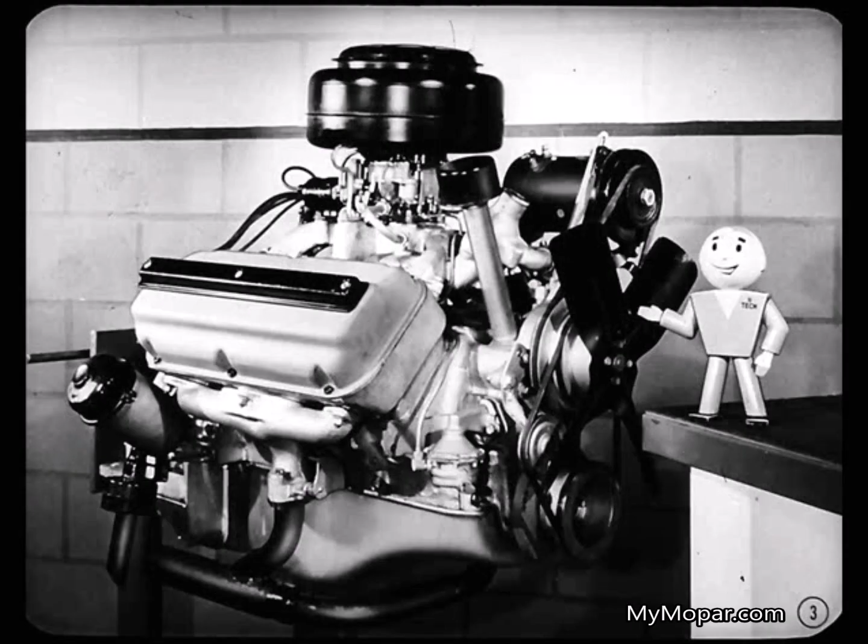Hi, fellas. You're looking at a Chrysler FirePower engine, the latest thing in V-type overhead valve engines. And even if you're not working in a Chrysler dealership, I'm sure you want to know all about the FirePower engine. And, of course, you never can tell when a Chrysler owner is going to come in and call on you for help. You'll want to be able to take care of him.

Now, that's Fred Lafferty over there. He's a service manager, and he's just returned from attending a Chrysler FirePower V8 engine school. Naturally, Fred is just busting with information. So, let's listen in. Well, fellas, there's a lot that's new on the FirePower engine, and we can't cover all the features in one session. But just pop your questions, and we'll cover as much as we can.

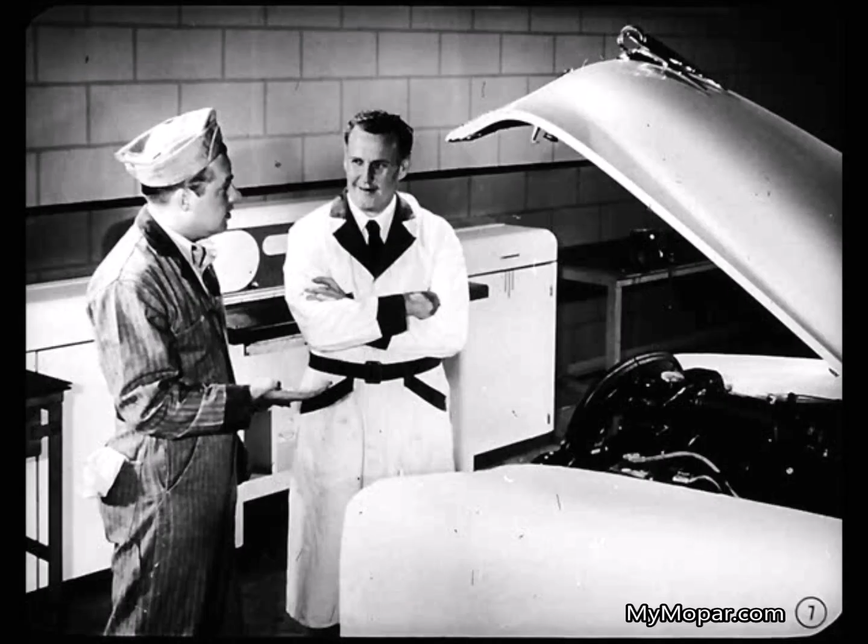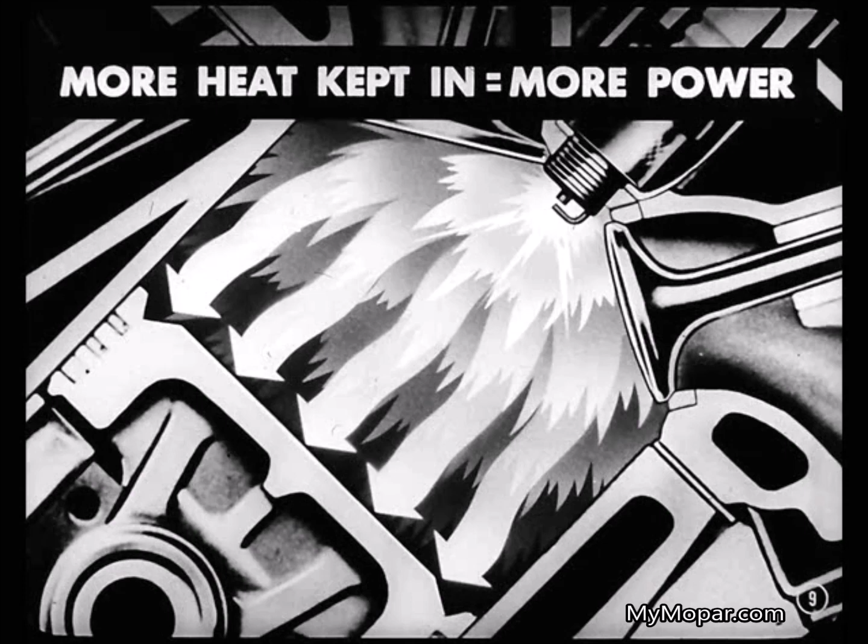One thing I'd like to know, Fred, is why the engine develops so much power and still gives such good gas mileage. Well, that's due to a number of reasons. First of all, this engine has high thermal efficiency. That means how well an engine uses the heat energy available from combustion. You see, the energy that forces the piston down is really heat energy. So the more heat that's kept inside the combustion chamber and used, the more efficient the engine is.

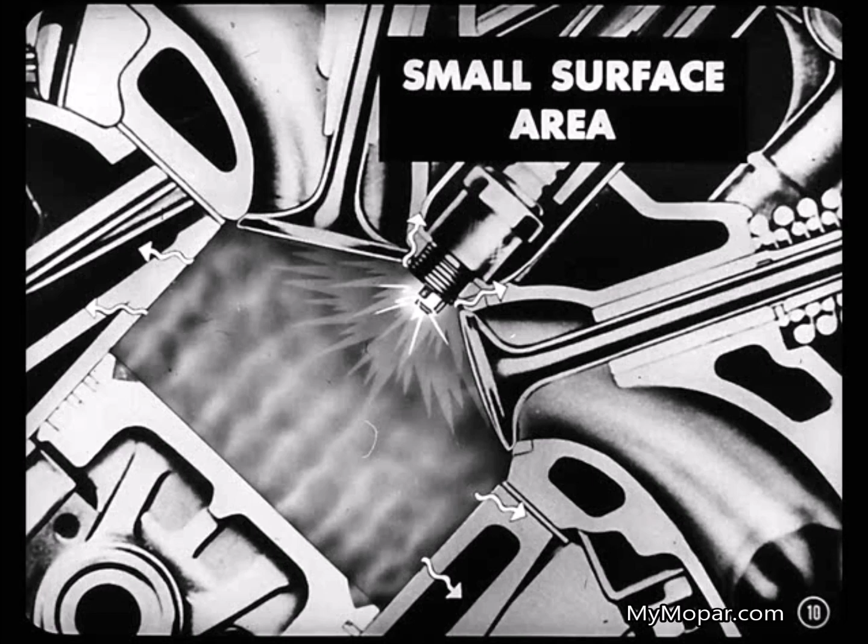Yeah, Fred. That's the big advantage of this hemispherical combustion chamber. It keeps the surface area as small as possible. Right, Tech. So very little heat is lost through the chamber walls. Besides that, water circulates completely around each cylinder and over the combustion chamber, maintaining a more uniform temperature.

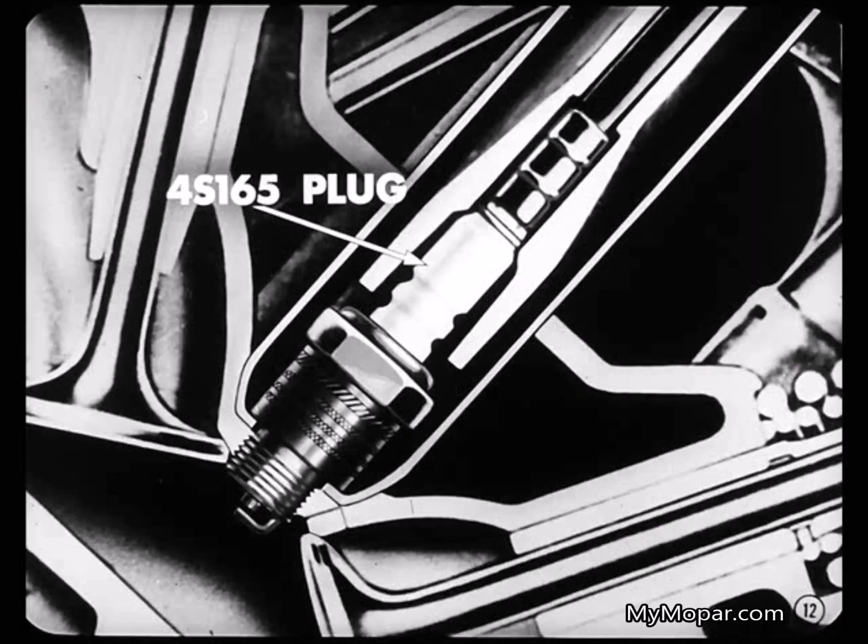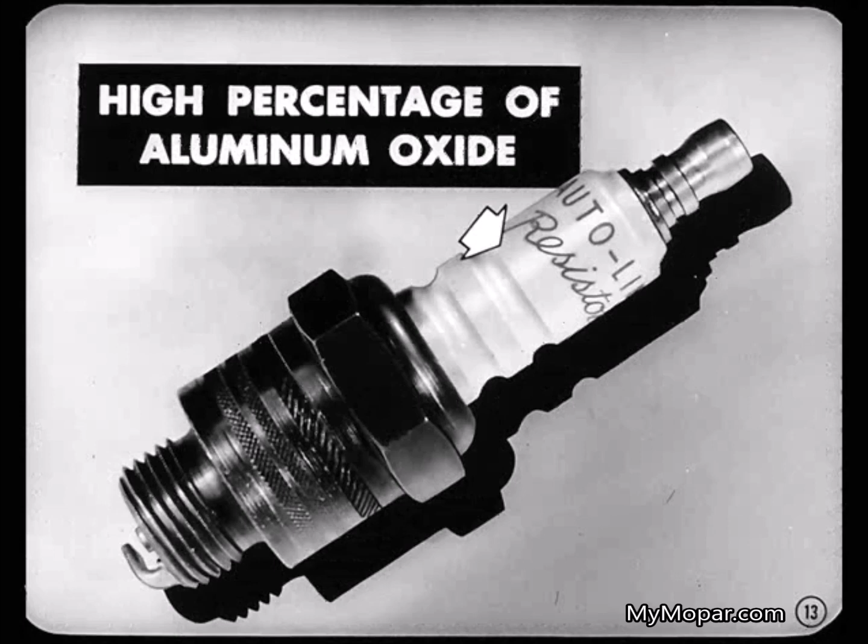Yeah, and here's another important point. The spark plug is a resistor type 4S165 designed especially for this engine. Use that plug only, and you'll get the best performance. Tech's right. That porcelain, for instance, contains a high percentage of aluminum oxide, like aircraft engine plugs. That means a stronger plug, one that resists heat better.

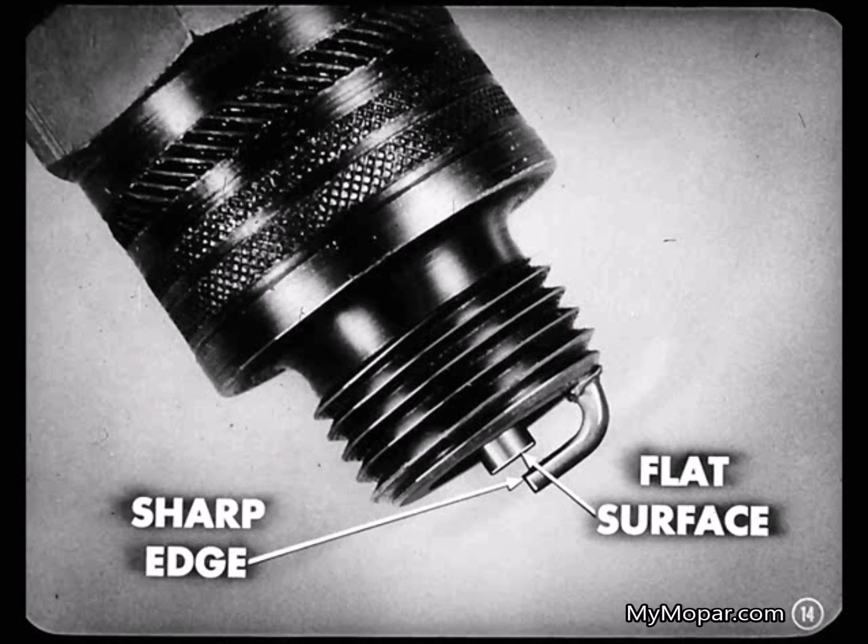You'll also notice that the side electrode doesn't completely cover the center electrode. That puts a sharp edge under a flat surface, which makes the spark jump the gap easier. The plug itself is located near the center of the combustion chamber. So the fuel mixture burns evenly and completely. That's because the flame has to travel only a short distance in the chamber.

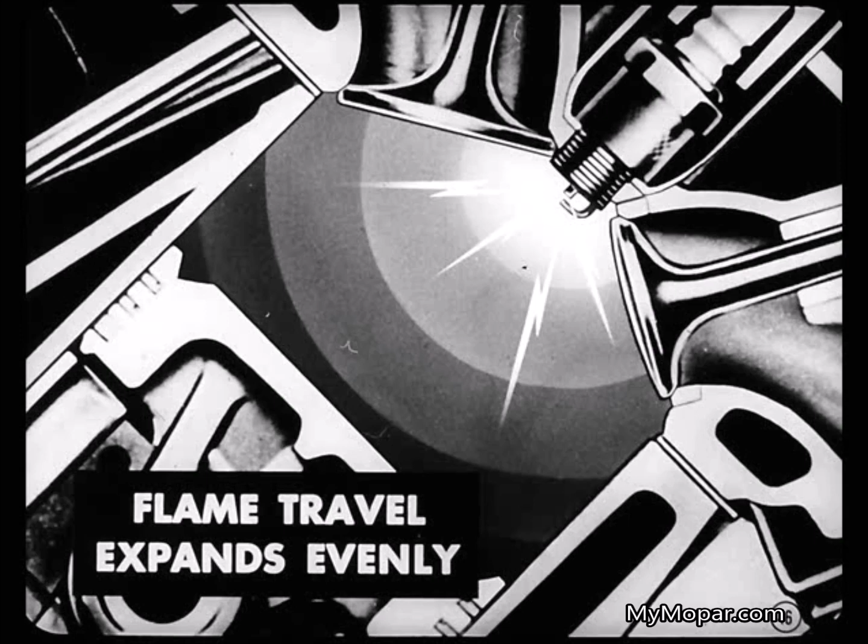What's more, the flame travel expands evenly. The central location of the spark plug in the combustion chamber contributes to complete combustion. So you get full power from the burning of the fuel. But that isn't the whole power story, Fred. No, it isn't. The high power output is due first to its high thermal efficiency, and secondly, to its high volumetric efficiency.

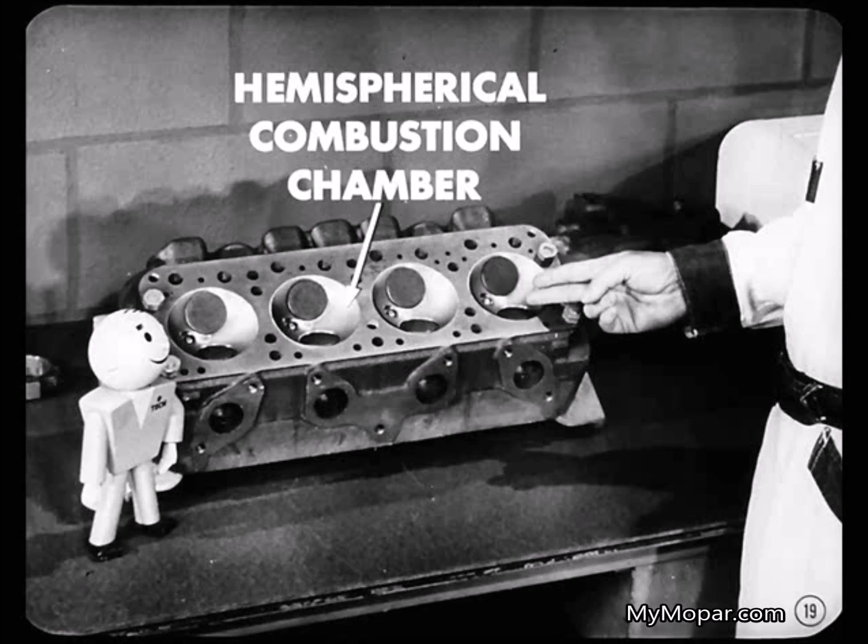Yeah, Larry. Volumetric efficiency is just a $50 term for good breathing. It means that the engine pulls in the maximum amount of air-fuel mixture and pushes exhaust out completely during each cycle. Right, Tech. And the hemispherical combustion chamber in this cylinder head also contributes to good breathing. What's more, the hemispherical chambers are all smoothly machined for more accurate control of the high compression ratio, 7.5 to 1.

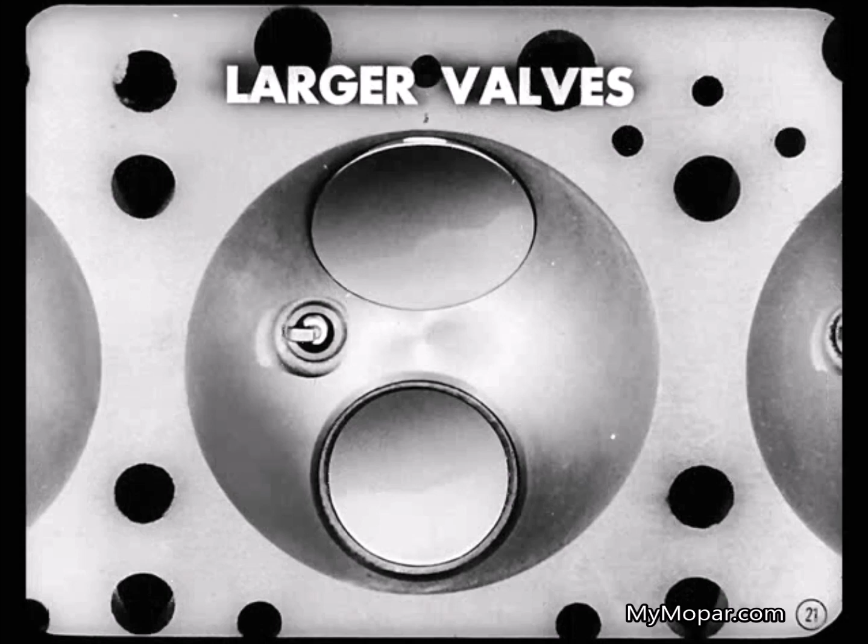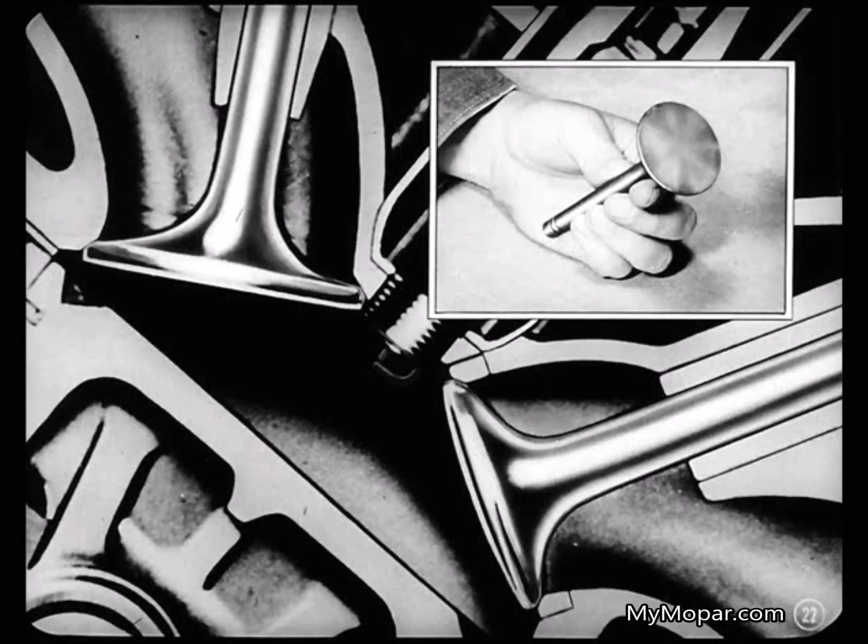I catch, Fred. I noticed something else. That hemispherical shape gives more room to use larger valves. Correct, Dan. And instead of in a straight line, the valves are on opposite sides of the chamber. Tell the boys about the valves, Fred. Sure, Tech. Larger valves contribute to volumetric efficiency because they get that much more mixture in. Another thing, each valve has two springs, one inside the other. That prevents spring flutter and ensures positive valve closing.

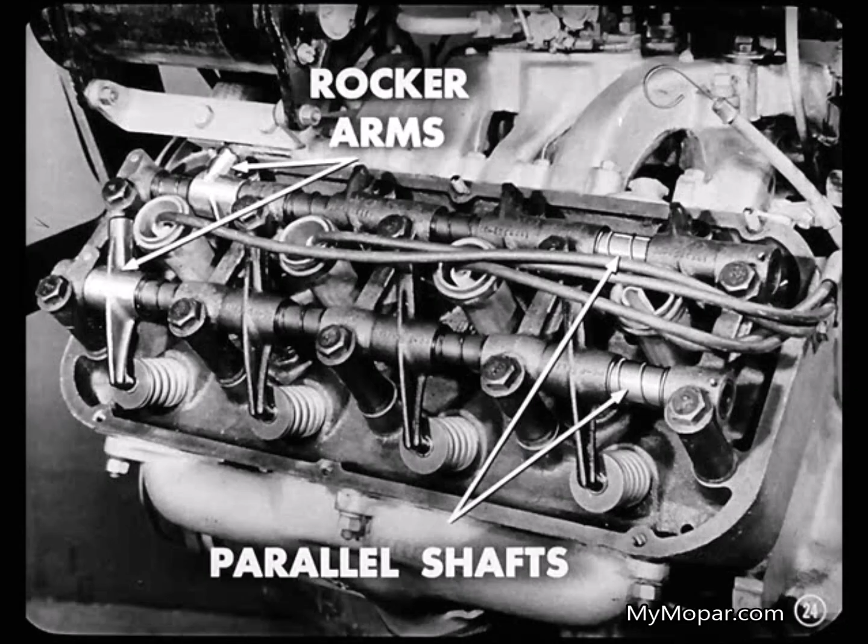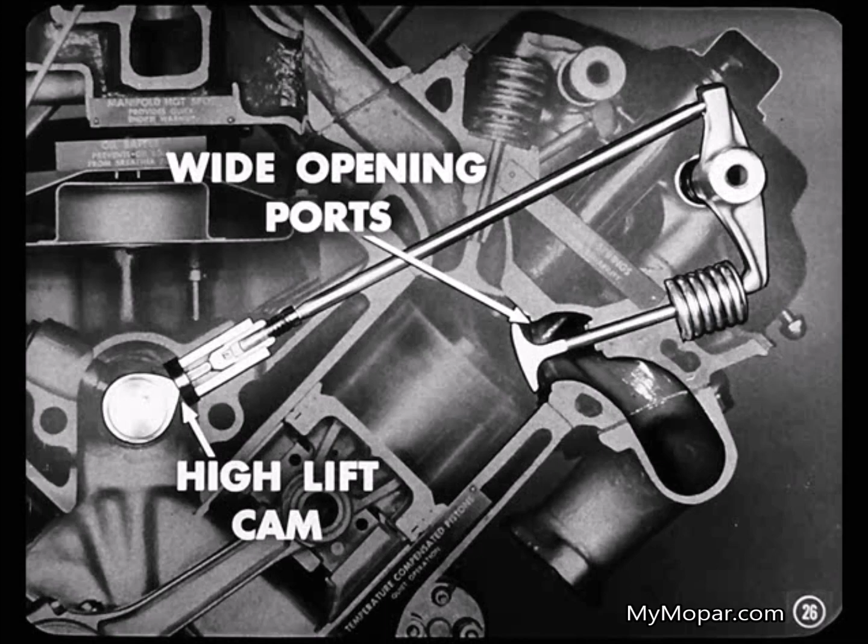I understand there's something else new, too. Aren't those rocker arms mounted on parallel shafts and pressure lubricated? Correct, Larry. This valve arrangement also allows a practically unrestricted flow of mixture into the combustion chamber and an unrestricted flow of exhaust gases. Two other things that speed up that flow are the extremely wide opening of the valve ports and the high lift design of the camshaft. Besides that, the intake and exhaust passages have no sharp turns. The flow is practically straight through from carburetor to exhaust manifold.

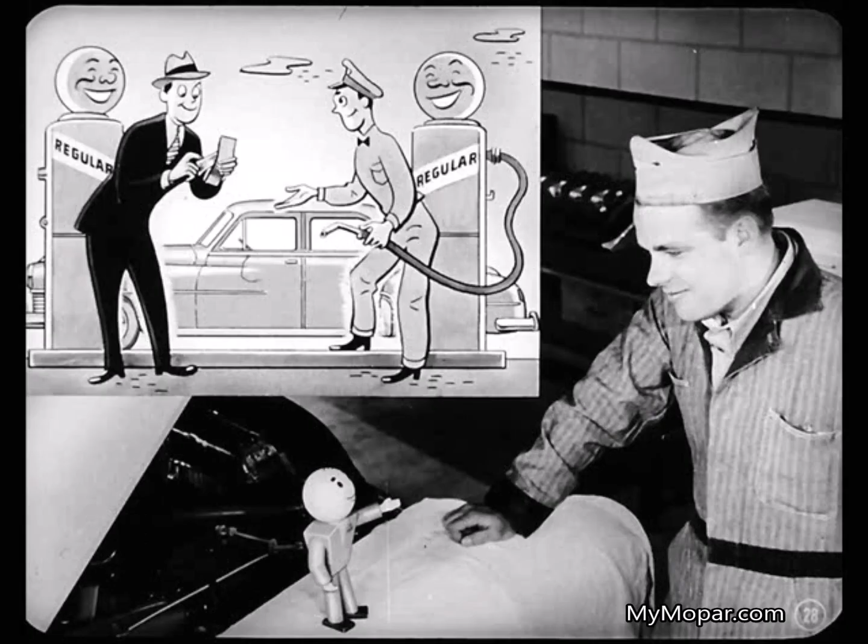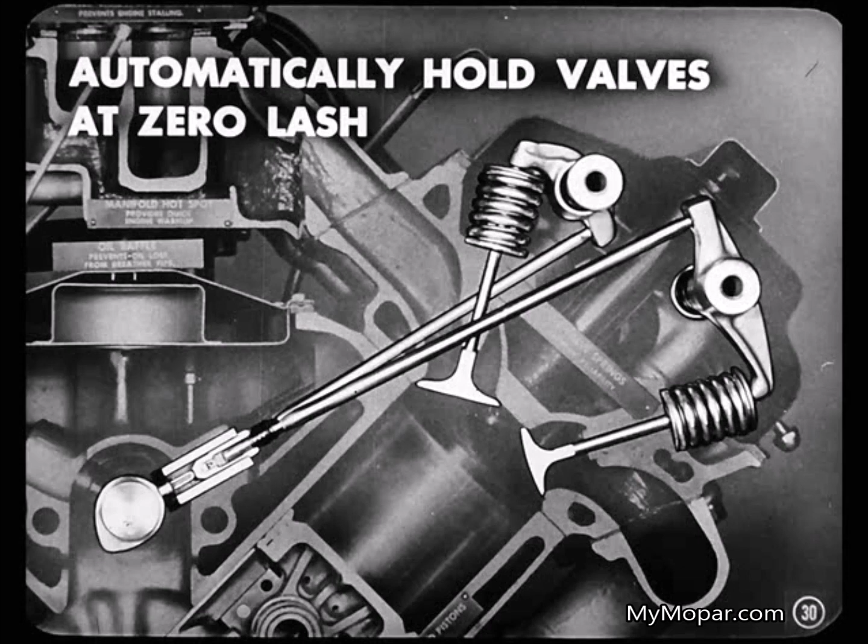What kind of gas does the engine use? Well, Dan, this may surprise you, but in spite of the high compression ratio, the design of the combustion chamber lets us use regular grade gasoline and still get efficient performance. That's true, Tech. Now, let's take up the matter of hydraulic tappets. Oh, yeah, Fred. I understand we don't have to adjust those tappets. That's right, Dan. These hydraulic tappets automatically hold the valves at zero lash. Better give the boys more detail on that, Fred. Okay, Tech.

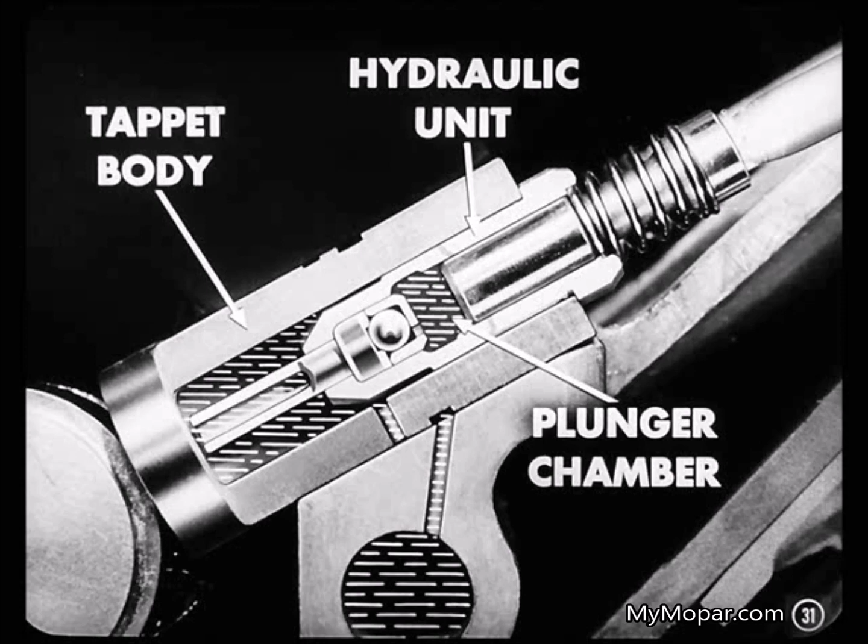Each tappet assembly consists of a tappet body with a hydraulic unit inside. The plunger chamber is filled with oil from the engine oiling system. When the engine starts, the cam raises the tappet body. The column of oil under the plunger, being non-compressible, moves the plunger to lift the push rod and operate the valve. Sounds good, but what about tappet servicing, Tech?

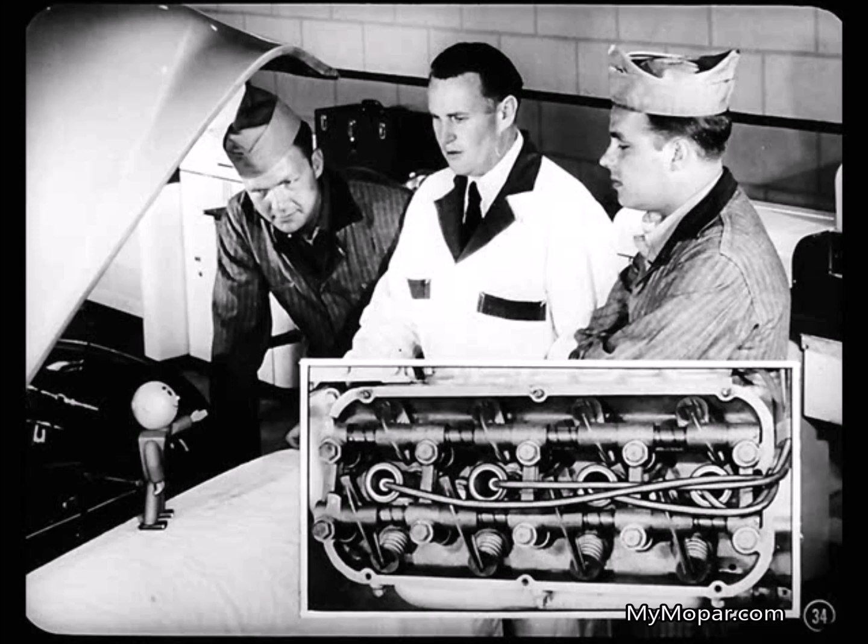Well, foreign matter in the tappet will cause noise. In that case, you remove and clean or replace the tappet. Fred can tell you how to locate the noise. Sure. You run the engine at idle with the cylinder head covers removed.

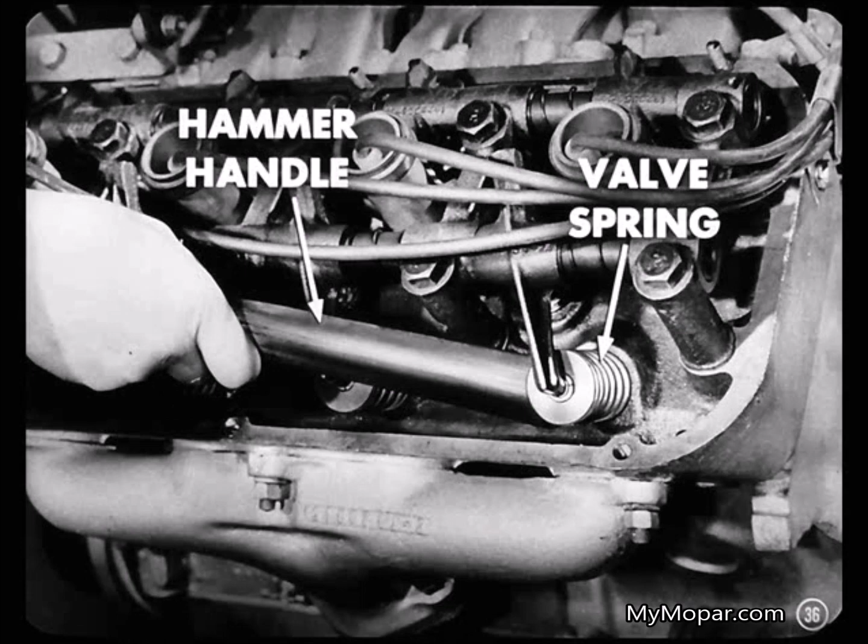Then press down on the push rod ends of the rocker arms until you find one that's noisy. If it's a slight noise, it'll get louder as you push down harder. But before you take the hydraulic unit out, make another quick check by using a hammer handle to put a side thrust on the valve spring. If this dampens the noise, it means that the valve stem's loose in its guide or the spring is cocked. Otherwise, it's a noisy tappet. So take out the tappet for inspection.

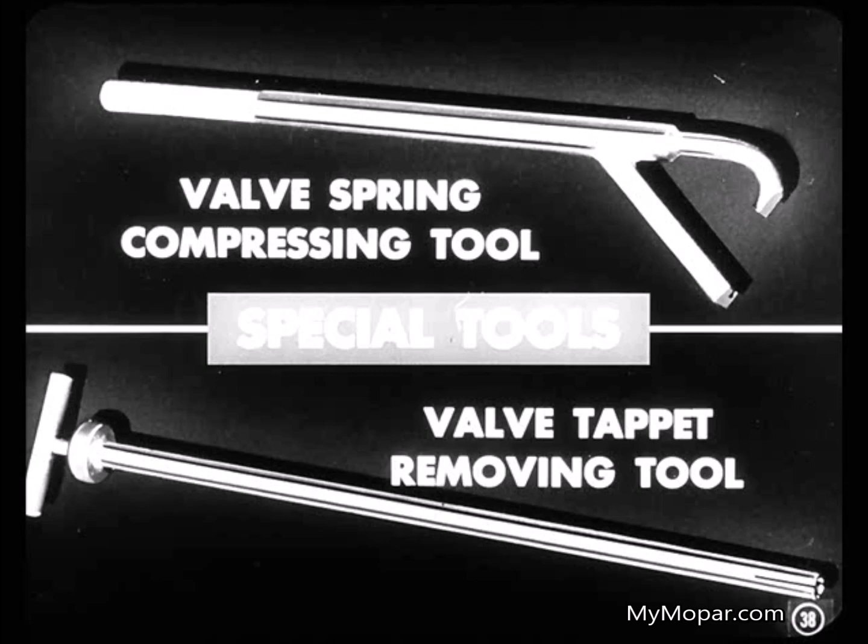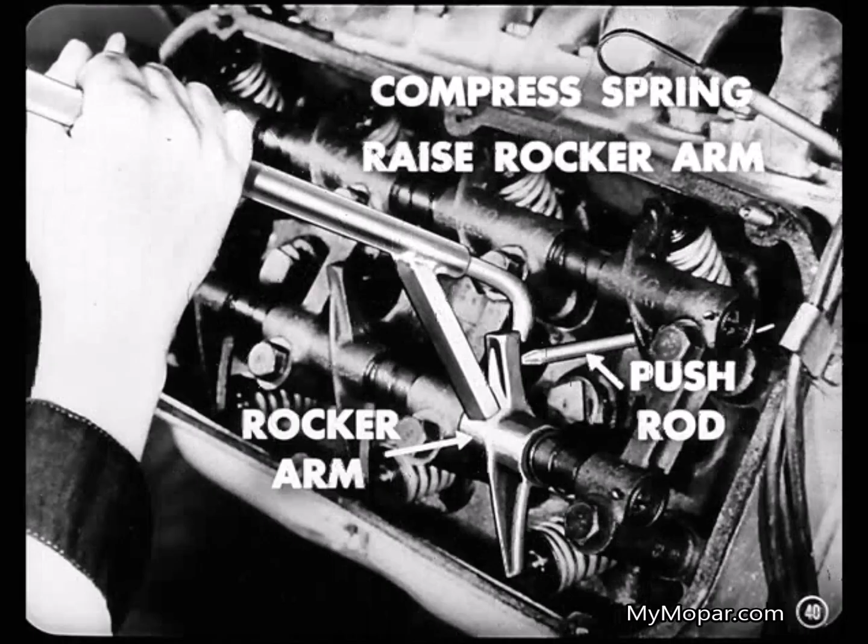Yeah, and removing these tappets, fellas, calls for two special tools. This valve spring compressing tool and this valve tappet removing tool. Fred can show you how you use them. Sure thing, Tech. First, slide the rocker arm away from the shaft bracket. Put the compressing tool over the arm with the heel of the tool resting on the valve stem side. Compress the valve spring enough to raise the rocker arm. This will free the push rod so you can move it to one side.

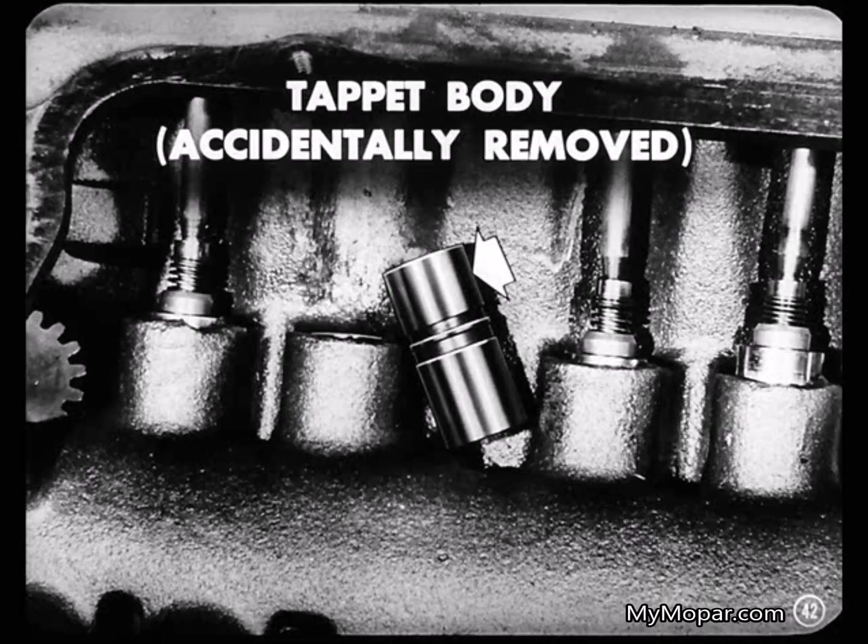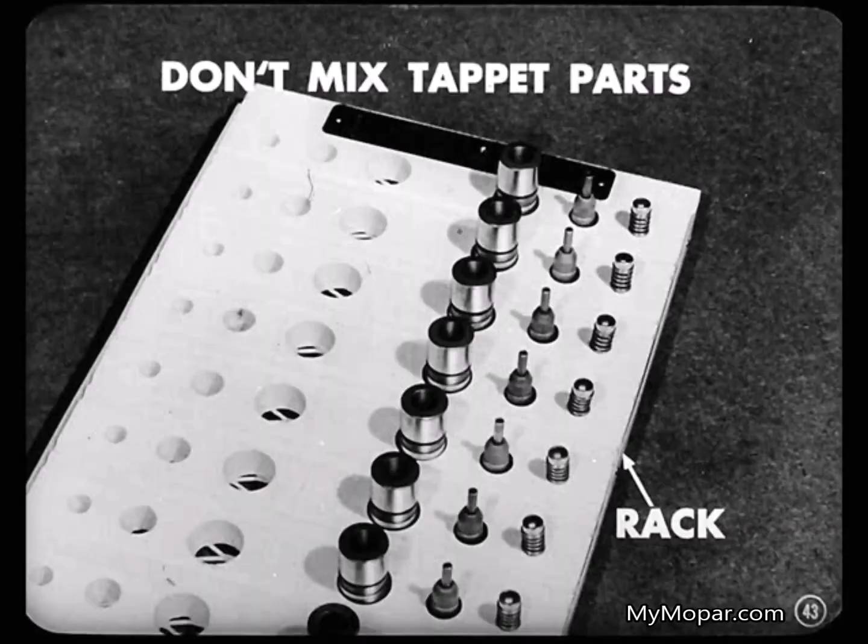Next, put the removing tool over the push rod and tappet plunger assembly. Slide the tool over the plunger spring and pull up the hydraulic unit slowly so the tappet body stays in the bore. Take it easy, because if the tappet body comes out accidentally, you'll have to remove the intake manifold and tappet cover to reinstall it. Here's something else. Don't mix the tappet parts because they're matched sets. You can make or buy a rack to keep the parts in order.

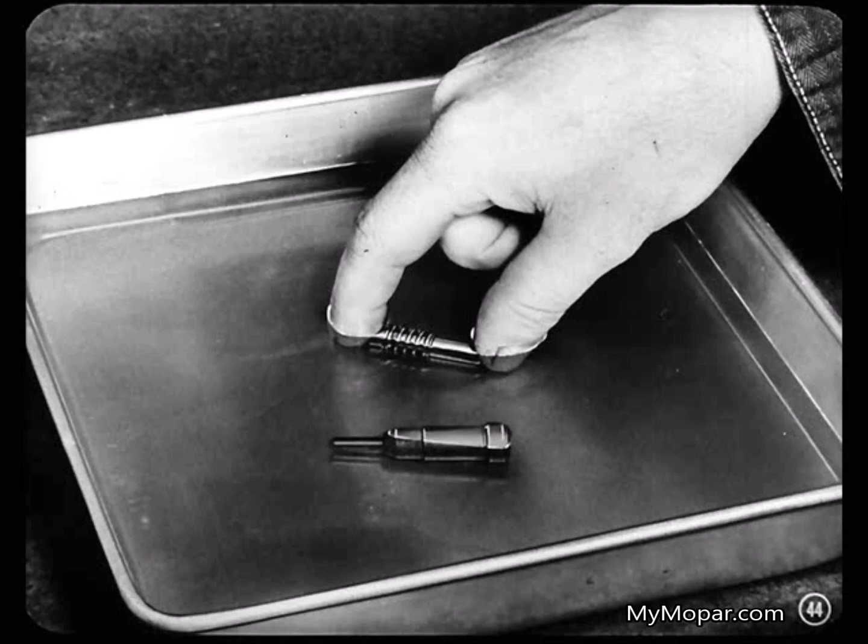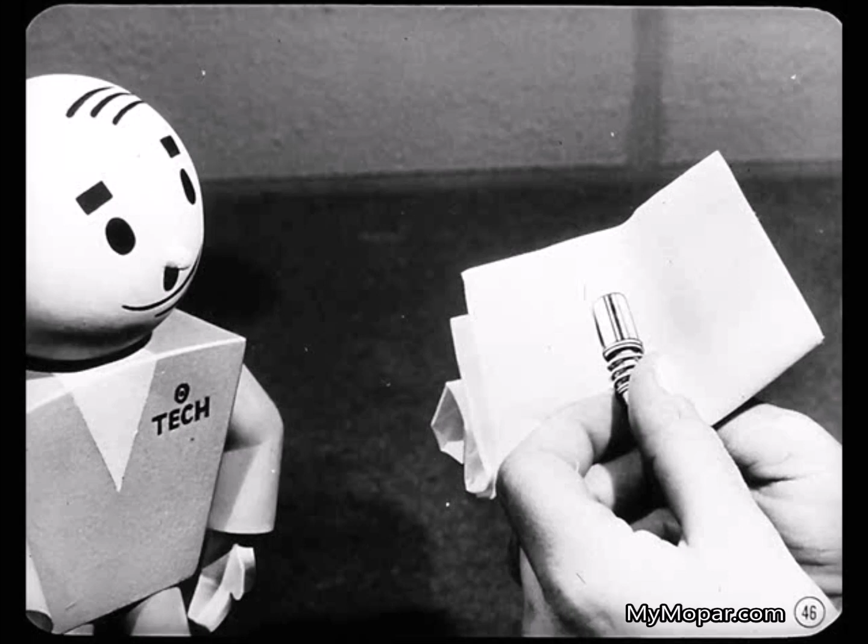Right, Tech. Now, fellas, you should take the hydraulic unit apart and clean it in commercial solvent. Then inspect it carefully for signs of wear. If the parts are worn or damaged, replace the unit. Otherwise, clean it thoroughly. Yeah, and when new parts are removed from their wrapping, play it safe. Clean them with solvent and wipe them dry in soft, clean tissue. Don't go using an old, dirty rag.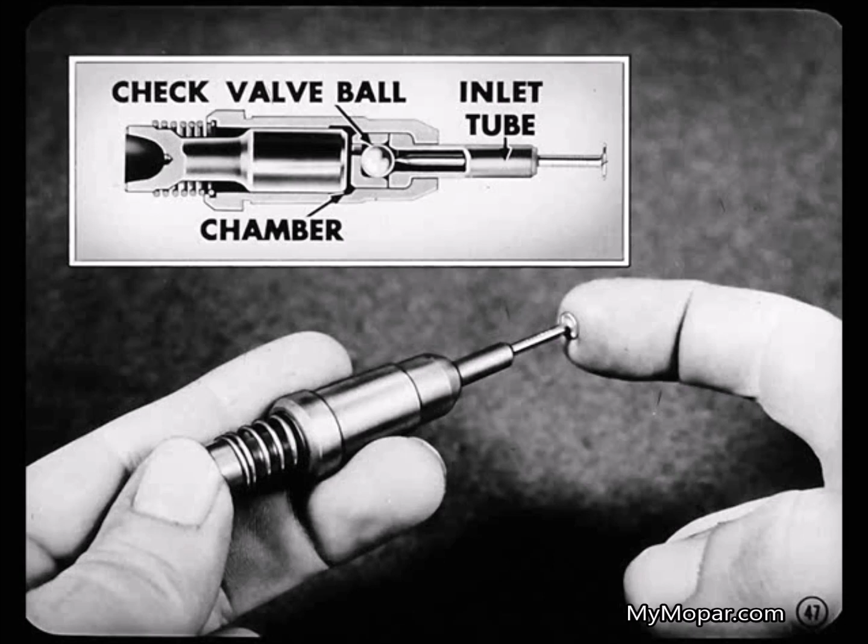Good point, Tech. Now, before you install a unit you've cleaned, push a small nail or wire through the inlet tube. This moves the check valve ball off its seat and releases any solvent trapped in the chamber. After that, use the special loading tool to draw a small amount of oil into the hydraulic unit. Then the tappet won't run dry when the engine is first started.

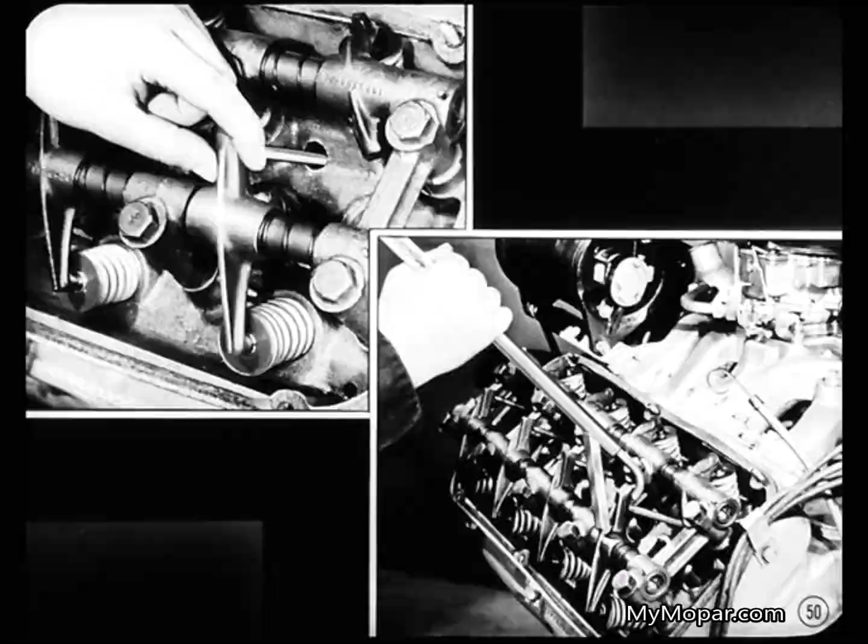You use the same removing tool to install a push rod and hydraulic unit. Then you position the rocker arm partially on the valve stem. With the compressing tool, squeeze the valve spring until you can slide the push rod into the rocker arm socket. That about covers tappets. So let's turn this record over and talk about some other FirePower features and service tips.

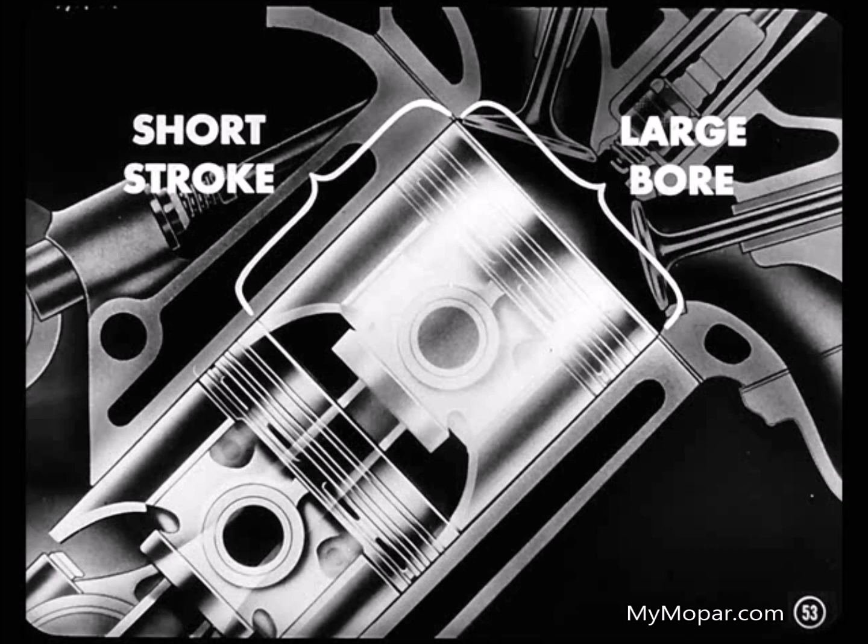Now, this engine also has very high mechanical efficiency. That means that there's less power loss due to friction. One reason that there's less friction is the short stroke, large bore design. The shorter stroke results in less piston travel, which cuts down piston speed. I follow that, Fred. What else is new?

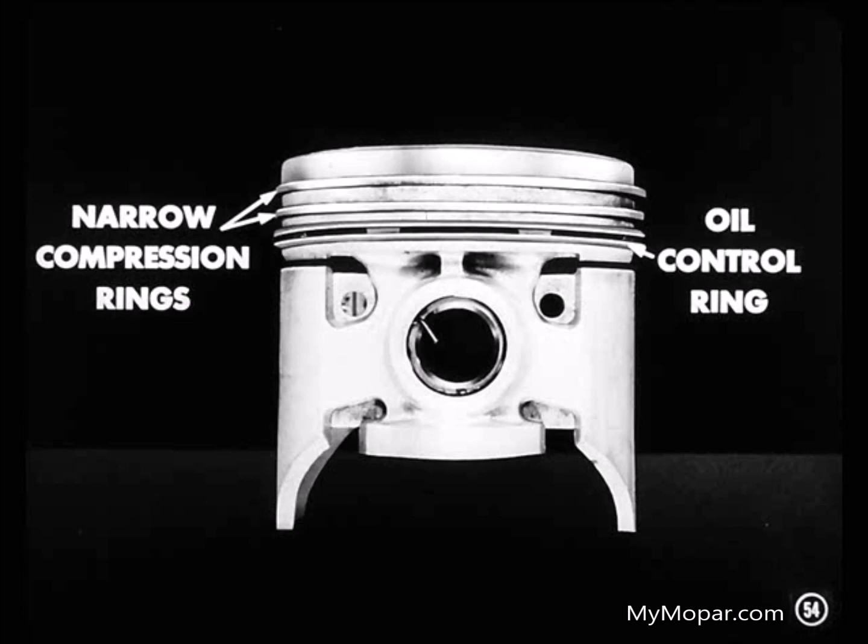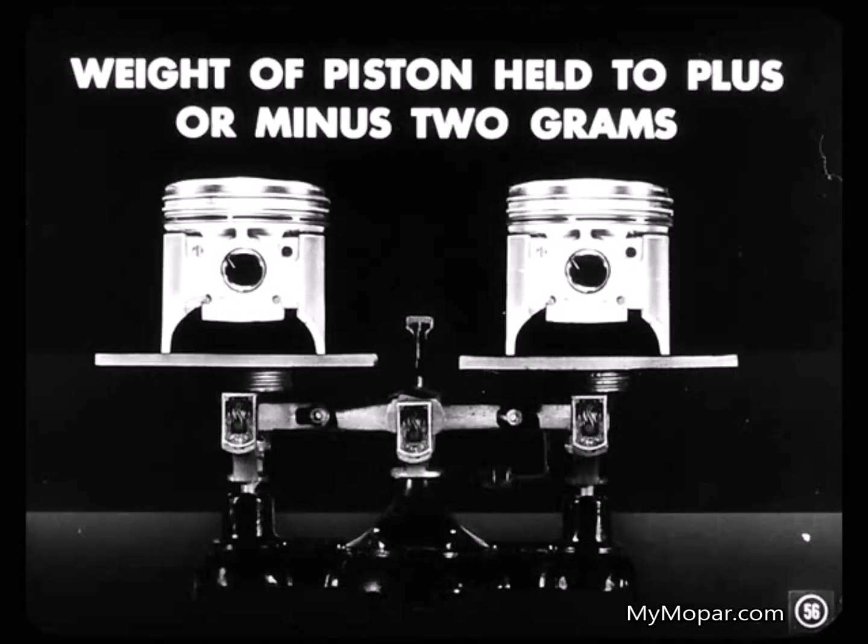Well, the engine has 3-ring slipper-type pistons. The compression rings are very narrow, which reduces friction because there's less surface contact. Besides this, there are steel struts in the pistons, which control expansion better. Yeah, Fred, and aren't the pistons accurately balanced? Right, Dan. The weight of each piston is held within plus or minus 2 grams, regardless of size. They're held that close to keep the engine well balanced for smooth operation.

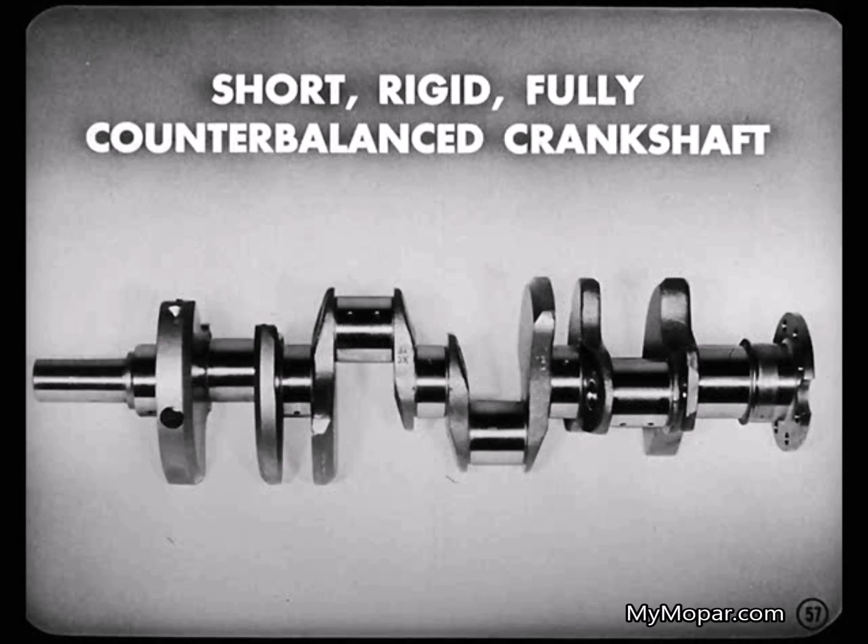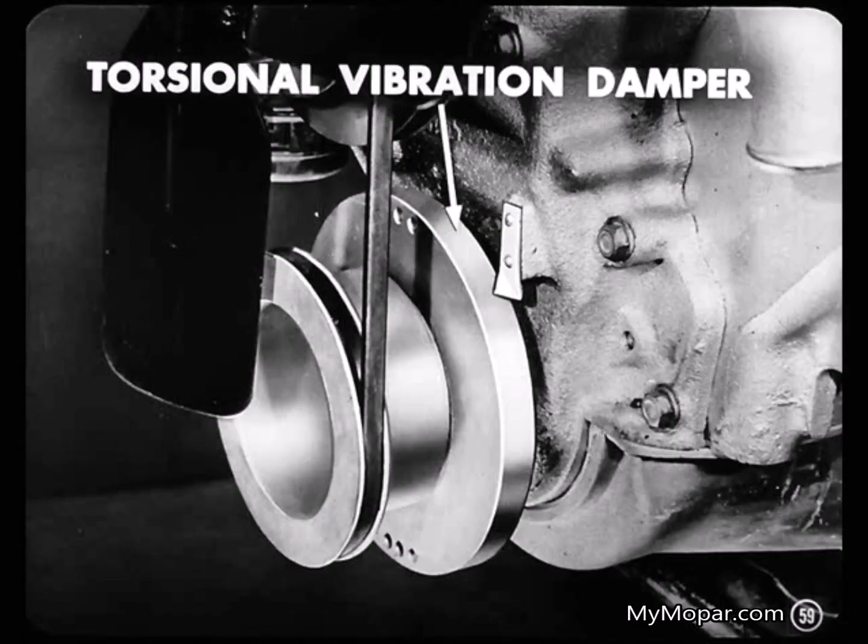Now, here's something else. The FirePower engine is short and compact. This permits the use of a short, rigid, and fully counterbalanced crankshaft. 5 large, precision-type main bearings support the crankshaft. This helps to cut down crankshaft deflection. A vibration damper mounted on the front end of the crankshaft cuts down torsional vibration.

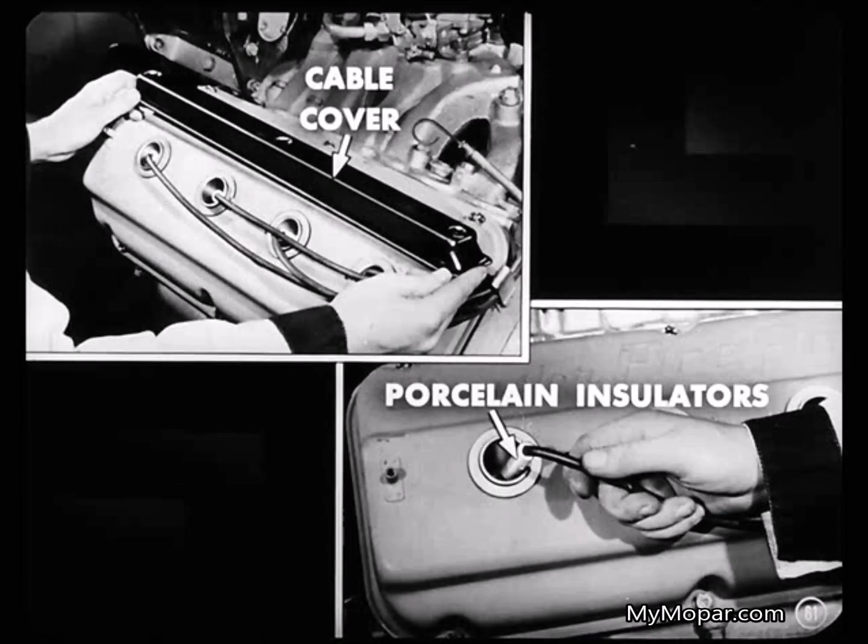How about some other questions? Okay, Fred. How do you get those spark plugs out of there? Well, Larry, you probably know the cable covers come off first. And then you pull out the wires and porcelain insulators. After that, you use this special thin-wall, deep-socket wrench to remove the plugs. Then you just pull the sheet metal tube up, and the plug comes out with it. Yeah, and the reason you use that special socket is so you won't break the porcelain.

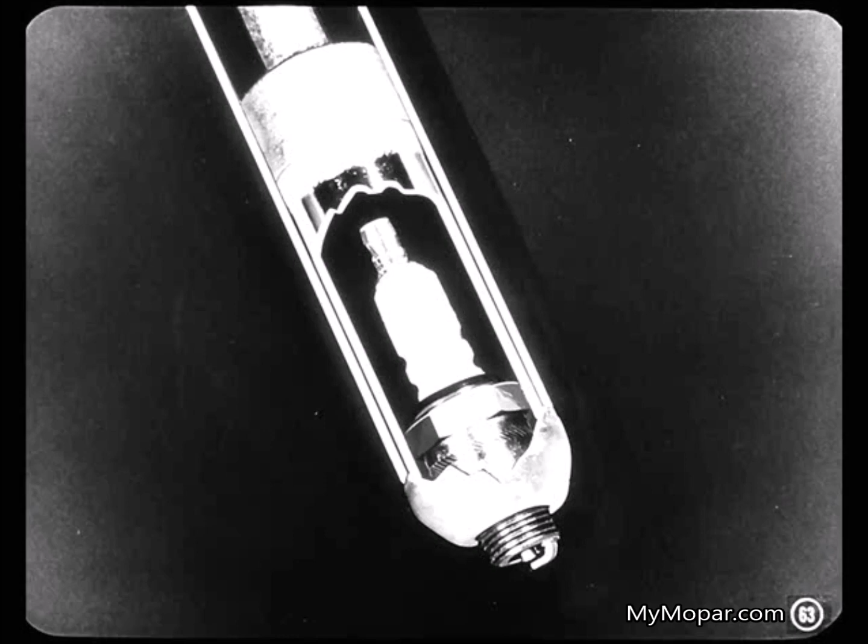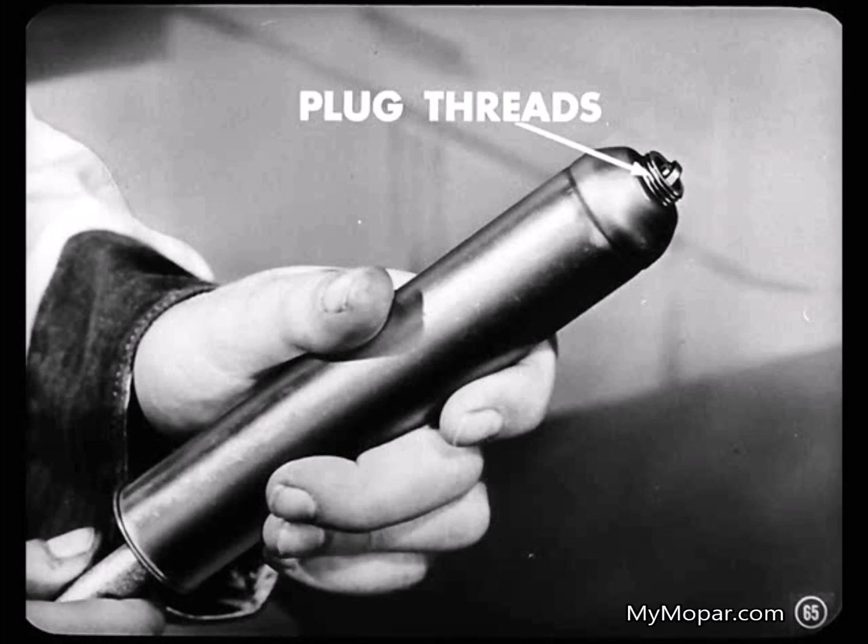Now, Fred, suppose you explain spark plug installation. Okay, Tech. Now, what you do, fellas, is invert this special socket and install the plug in it. Next, you put the metal tube over spark plug and socket, making sure the plug threads stick out of the tube. The tube acts as a gasket, so no gasket is needed. Now, holding these parts together, install the plug and tighten it to a torque of 32 foot-pounds. Then, replace the insulator wire and cover.

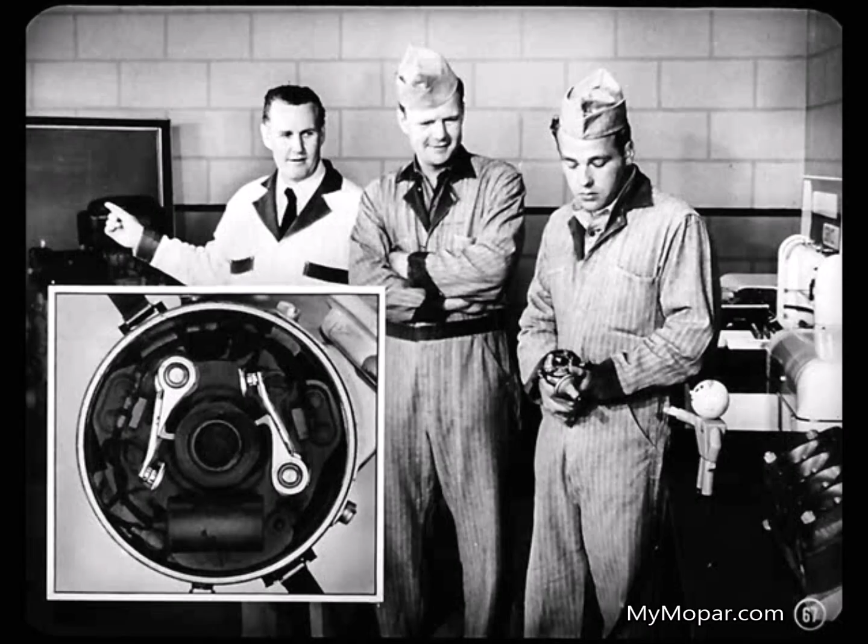Now, Fred, how about explaining the two sets of breaker points in the distributor? Okay, but I can show it better on the blackboard. Now, for example, one set of points is called the maker, the other, the breaker. Both sets of points are connected in parallel circuit and are individually grounded. This parallel setup means the spark won't occur until both points are open. Now, here's something else.

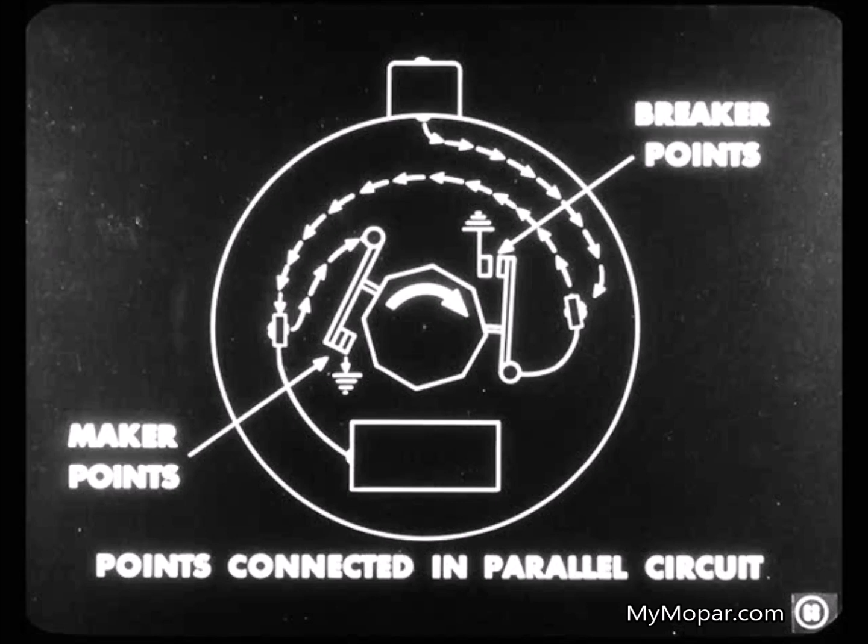The points are positioned on the mounting plate so that one set opens several degrees ahead of the other. When the maker points are closed, the breaker points are just starting to close. As the cam turns a little more, the maker points open. And since the breaker points are still closed, no spark occurs. But as the cam continues to turn, the breaker points open. And that's when you get the spark at the plug.

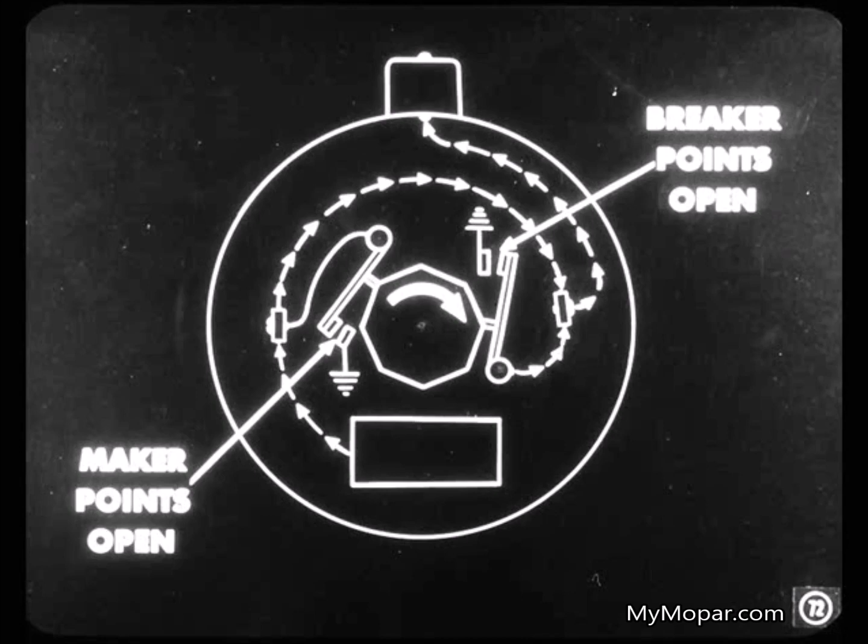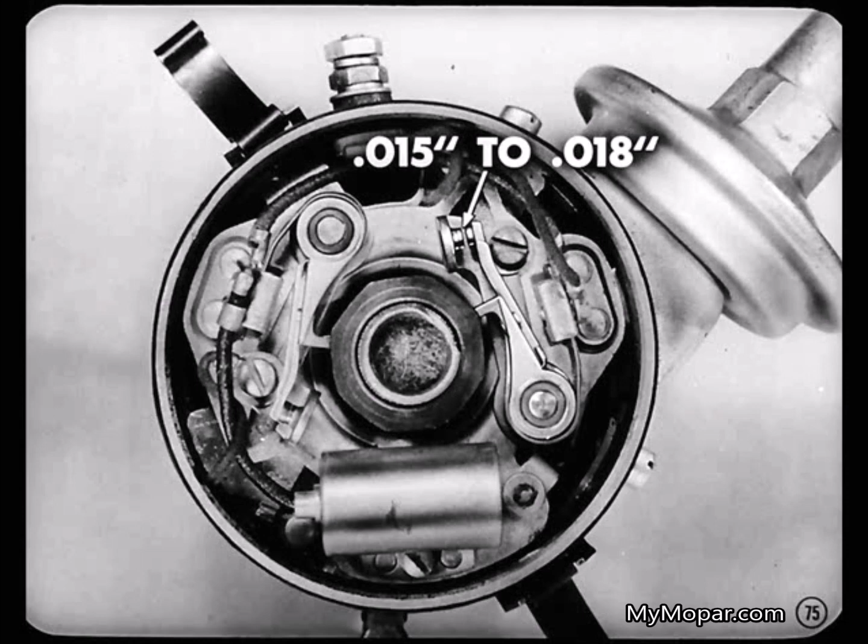Nice going, Fred. Incidentally, fellas, this dual-point setup permits a greater buildup of voltage in the coil. That's because the primary circuit is closed longer than if you had only one set of points. As a result, there's a stronger spark at the plug. I think I understand it now, Tech. What's the gap setting for those points? 15 to 18 thousandths, Dan, and it's got to be within those limits. Fred better give you the details.

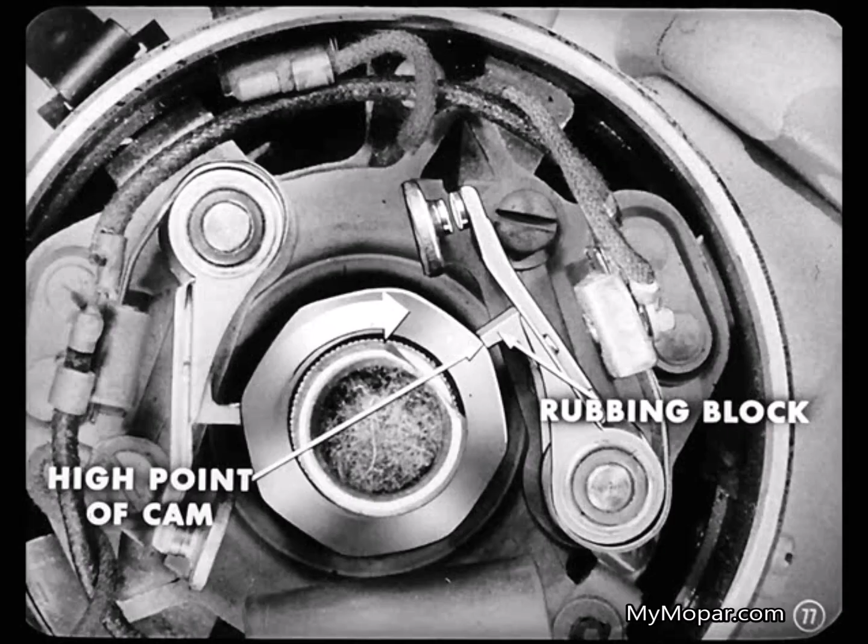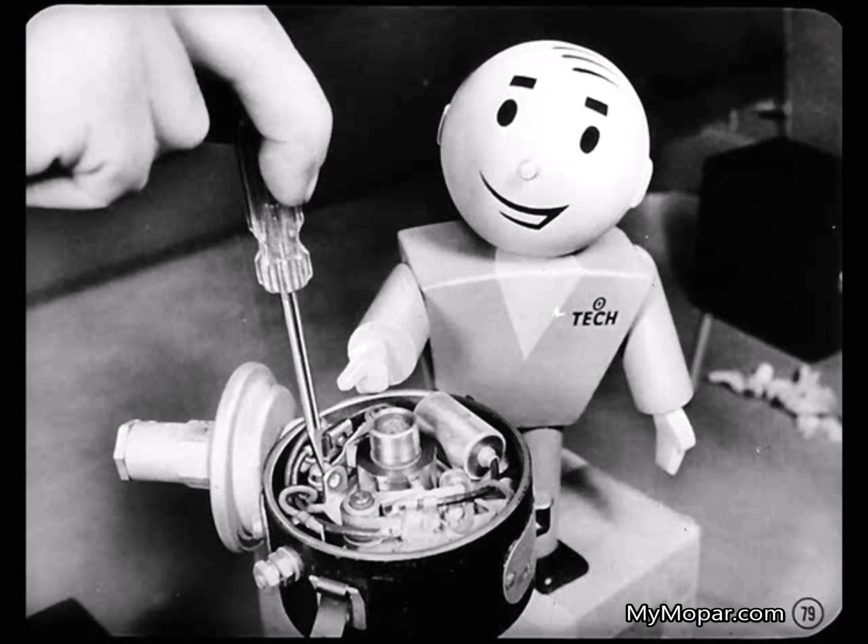Sure thing, Tech. You just loosen one of the stationary plate lock screws, Dan, so there's a very slight drag on the plate. Then you turn the distributor shaft until the rubbing block is on the high point of the cam. Next, you put a medium blade screwdriver in the triangle between the points. Turn the blade against the stationary plate until you get the right clearance. After that, fellas, tighten the plate lock screw to hold that setting, and adjust the other set of points the same way. I see.

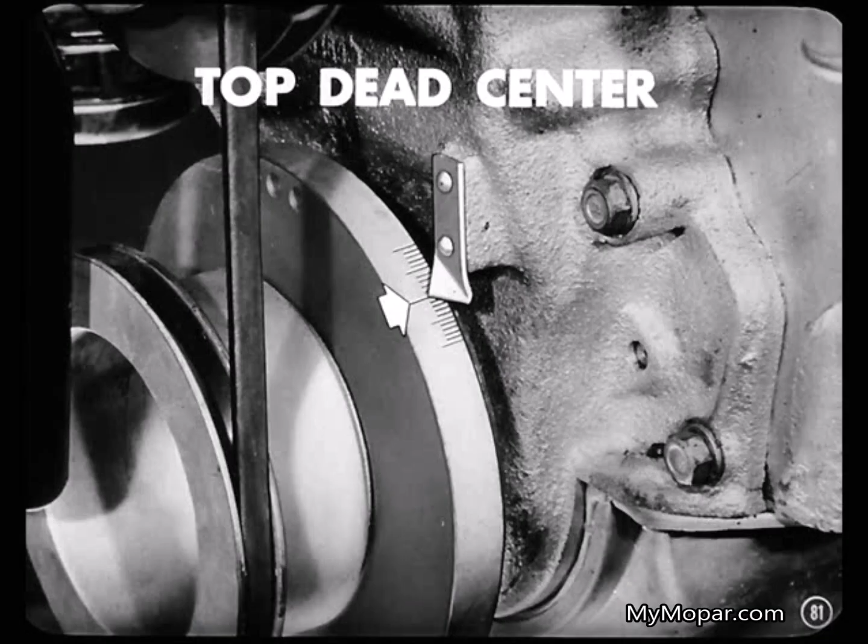I suppose you adjust timing next. That's the ticket, Larry, but it calls for a couple of special tools. How about starting with the timing light adapter, Fred? Okay, Tech. I'll demonstrate that timing story. To begin with, you turn the engine over until the dead center mark on the damper lines up with the pointer on the chain case cover.

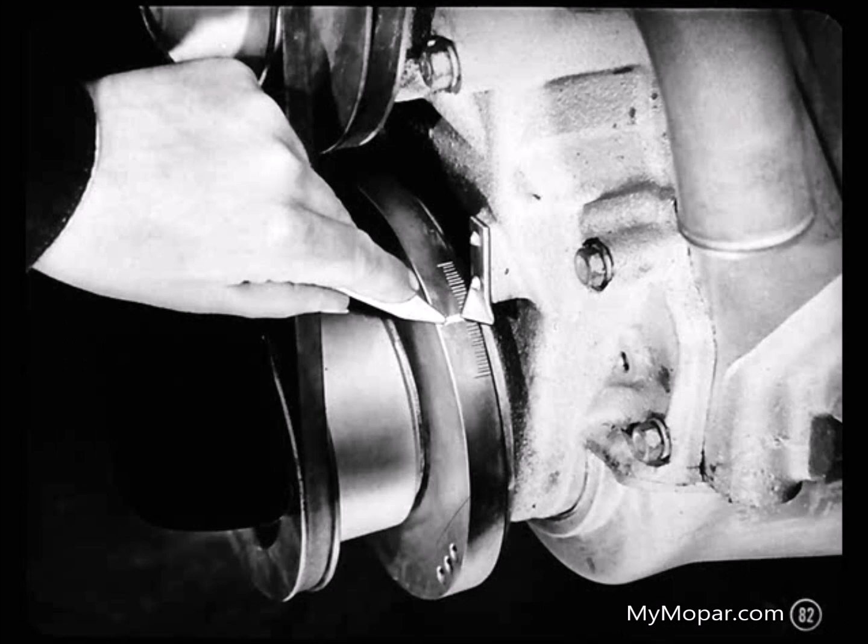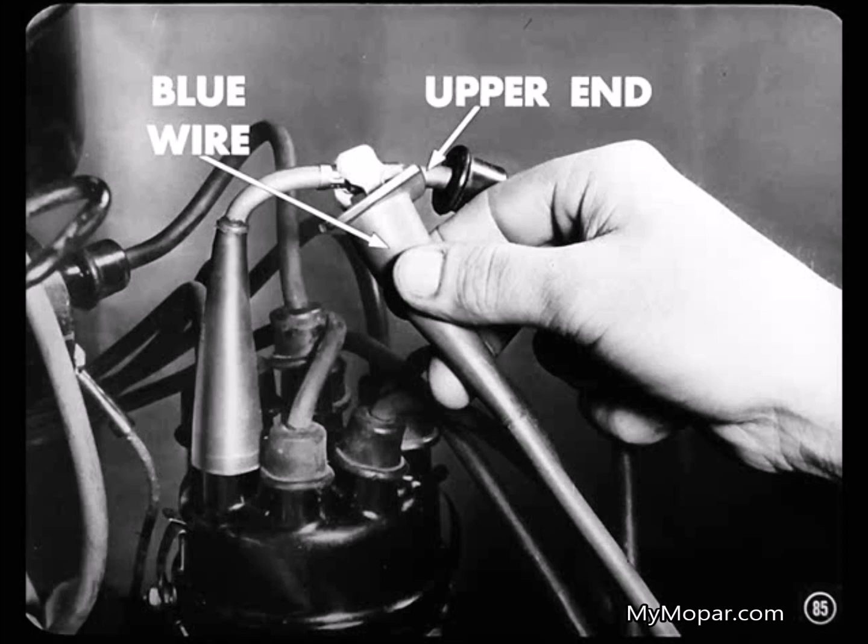Okay, top dead center. Next, you chalk this mark on the damper so you can read it better under the timing light. Following this, remove the number 1 spark plug wire from its tower in the distributor cap. That's the first tower counterclockwise from the clip closest to the coil. Put the male end of this timing light adapter in the tower and put the spark plug wire in the other end of this adapter. Then, you clip the blue wire of the timing light to the upper end of the adapter. Hook up the timing light black wire to the negative battery post and connect the red wire to the positive post. I see, Fred. Then what?

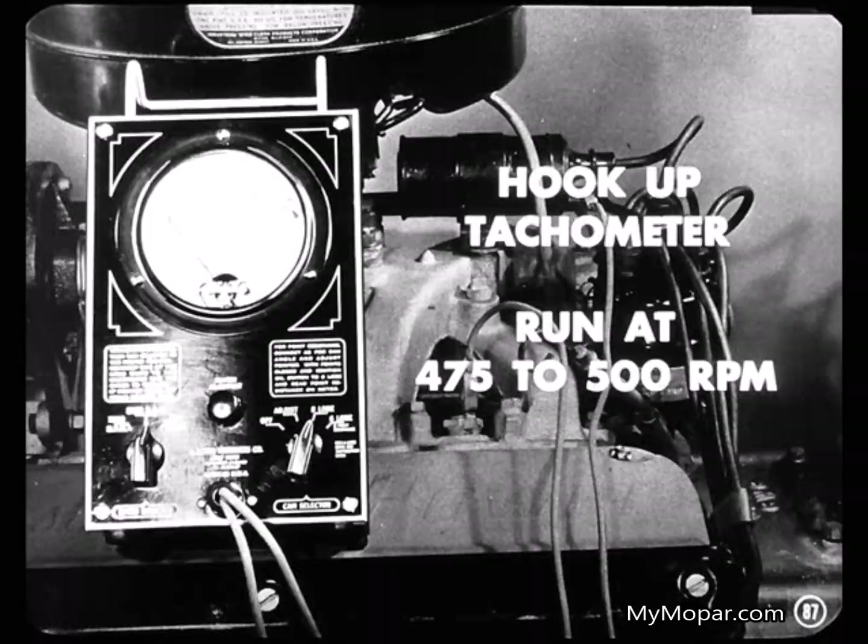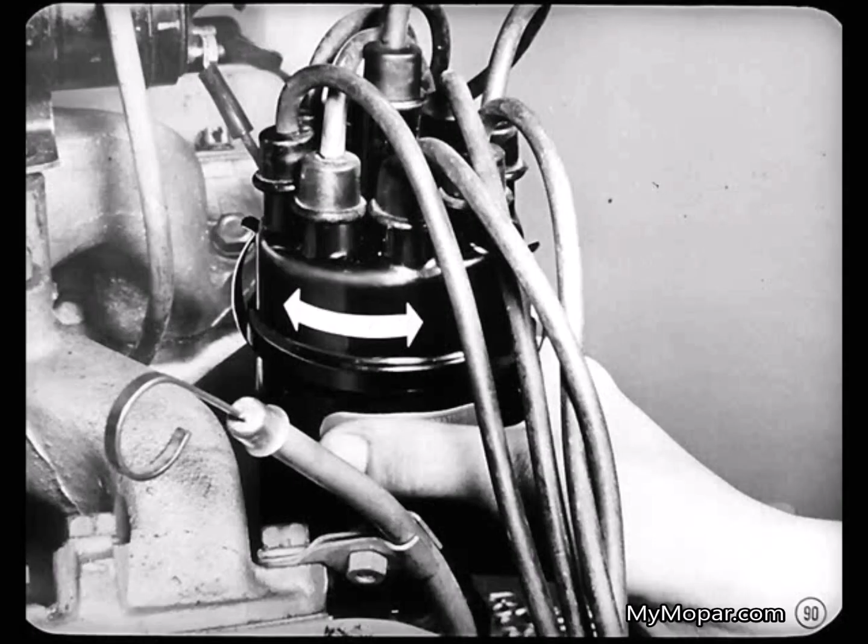Well, Dan, you hook up a reliable tachometer and start the engine. Let her warm up until she idles at 475 to 500 RPM. By the way, remember to hold the accelerator 1/3 of the way down as you start the engine. This gives the right mixture for faster starting. Right, Tech. Now, if timing's okay, the light will flash when the timing mark on the damper is opposite the pointer. If the timing isn't right, adjust the distributor position to bring the mark under the pointer.

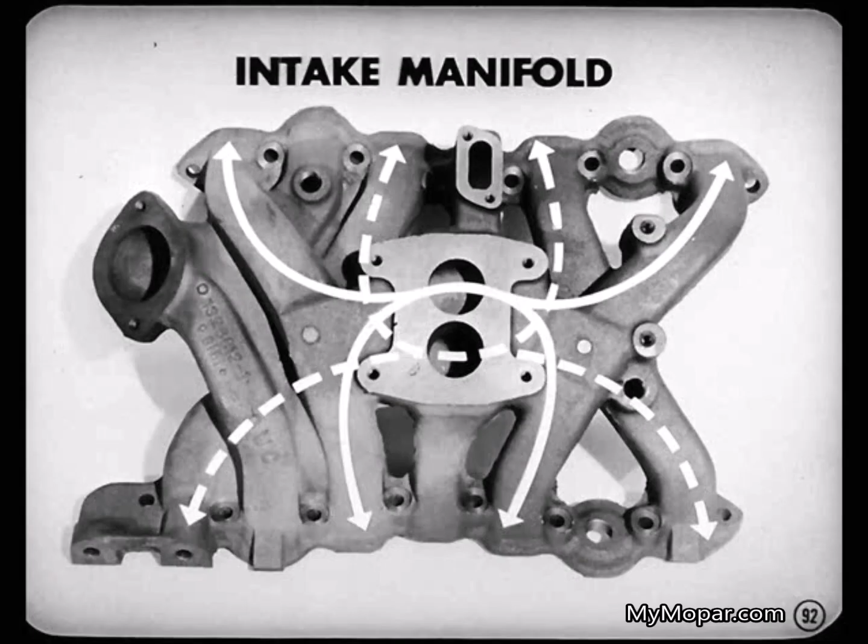I see. I suppose you adjust the carburetor next, eh, Fred? Yeah, Larry. But let me point out what's new on that dual-throat type carburetor. Each throat, you know, feeds only 4 of the cylinders. Now, here's something else. The intake manifold passages are arranged so that each riser feeds the 2 end cylinders on one bank and the 2 center cylinders on the other bank. In other words, fellas, the fuel passages are all about the same length, so the mixture is distributed evenly among the cylinders at all speeds.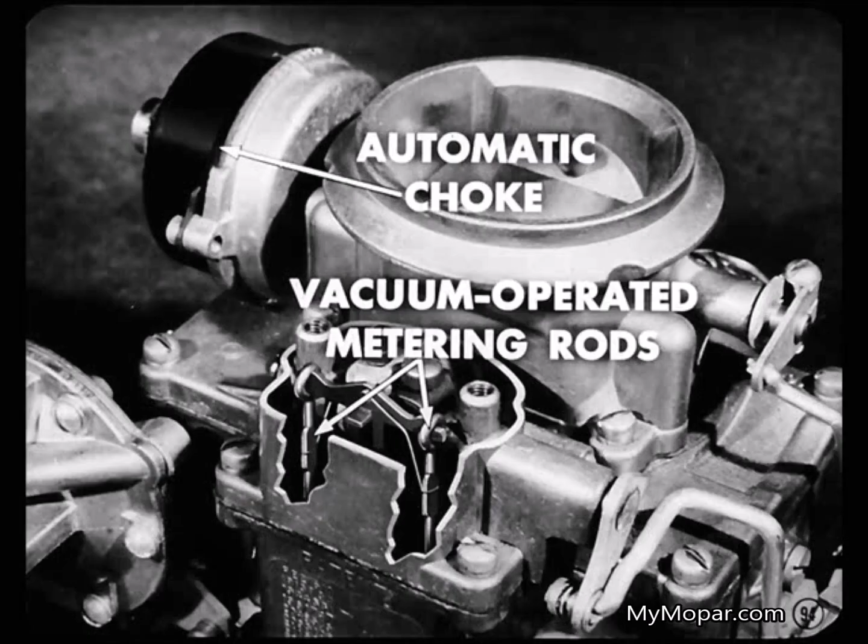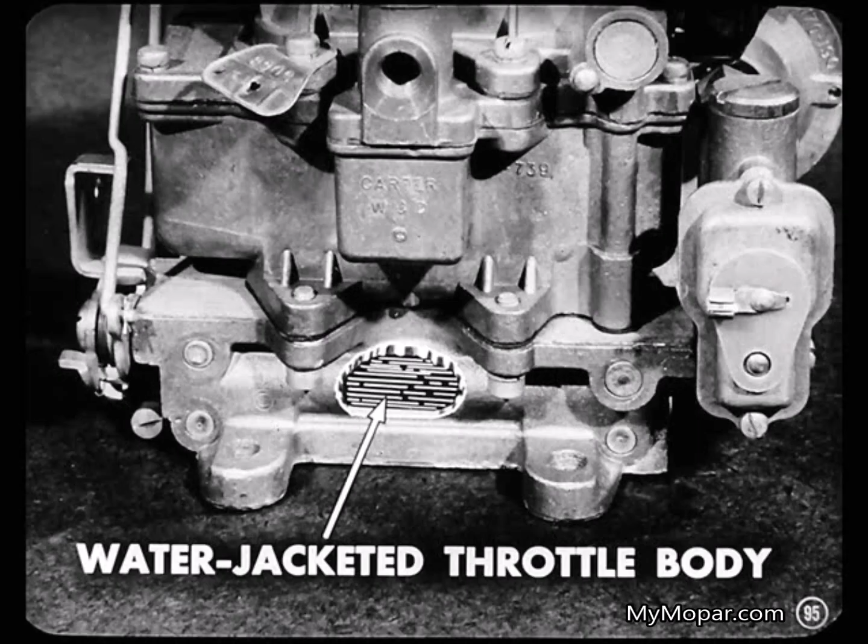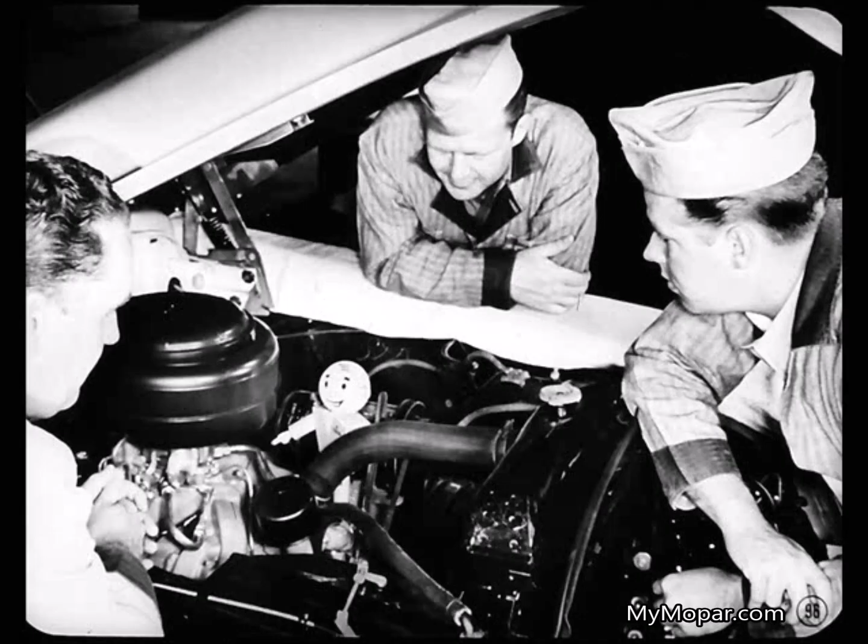Right, Tech. Now, the carburetor's also got a built-in automatic choke and 2 metering rods that are vacuum-operated, and a water-jacketed throttle body which maintains a more uniform temperature. This water jacket is particularly helpful in those areas where stalling may occur due to ice forming on the throttle valves. That may happen when the air is extremely humid and the temperature is between freezing and 55 degrees. That's a good point, Fred. Now tell the boys how you adjust idle mixture with these 2 screws.

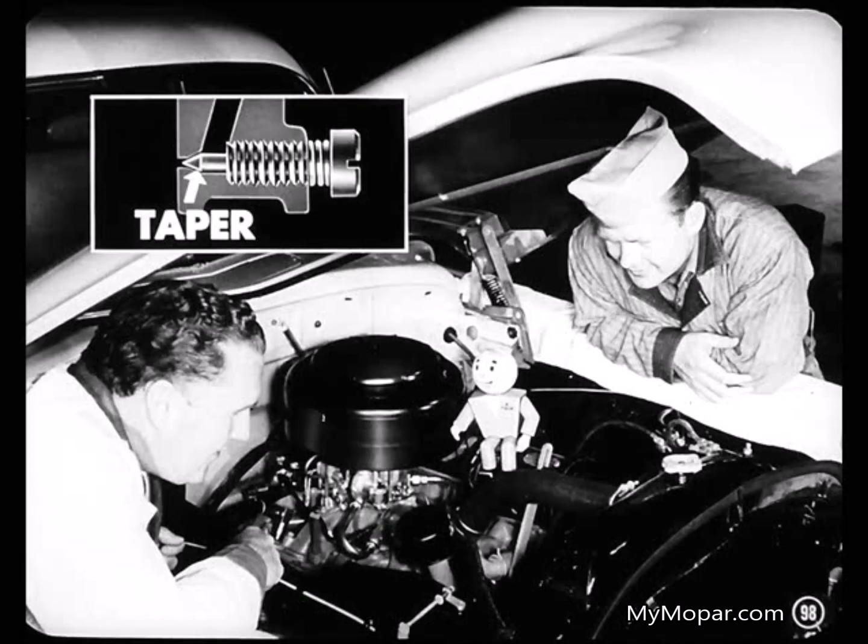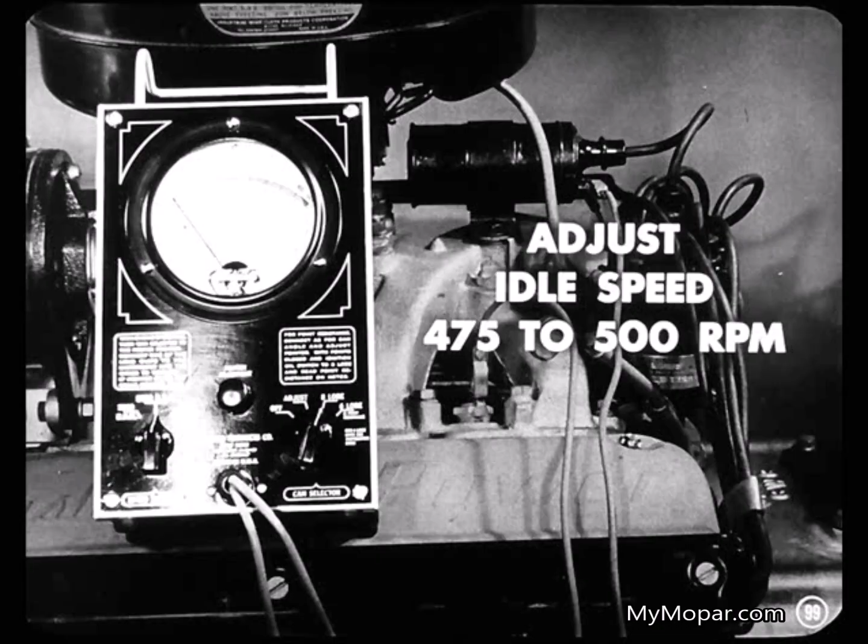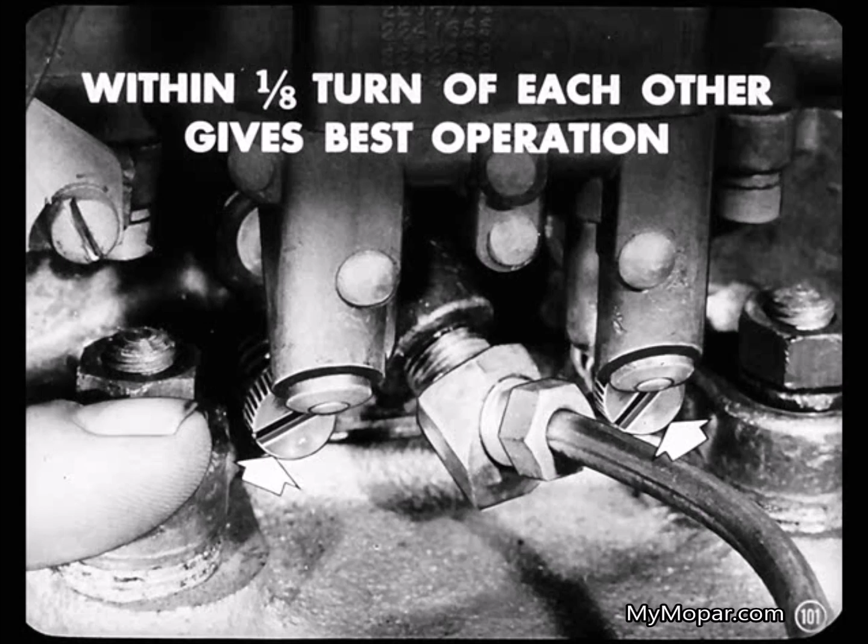Okay, Tech. Before starting the engine, turn each idle screw clockwise until it seats. Then turn each screw back 1 full turn. But take it easy. You can damage the taper on the ends of the screws if you run them in too hard. Good point, Tech. Now, fellas, you start the engine and warm it up to normal operating temperature so the choke valve is wide open. Adjust idle speed to 475 to 500 RPM. After this, turn each idle mixture screw the same amount until the engine runs smoothly. On the final setting, the screws should be within 1/8 turn of each other to produce the best engine operation.

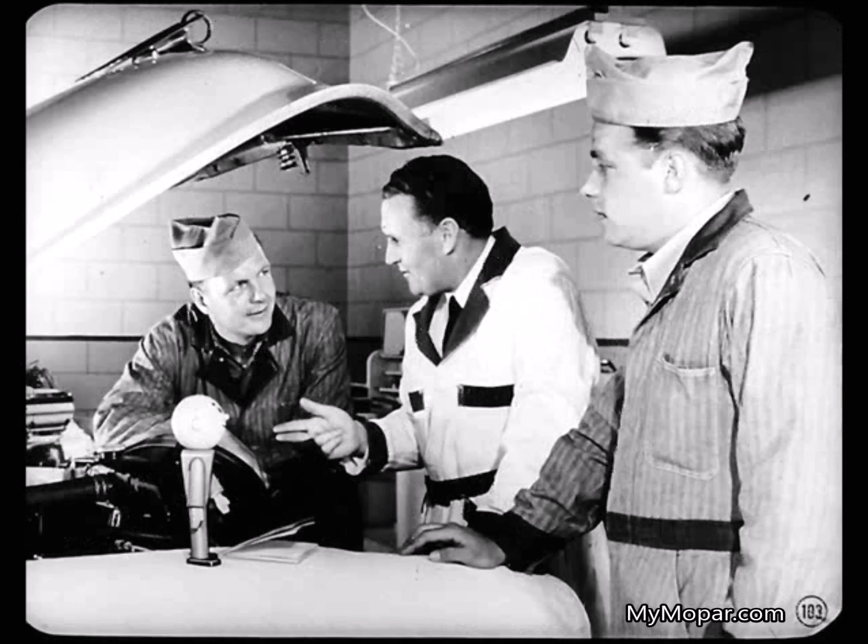Okay, Fred. I follow that now. I suppose you take the car out then and give her a good road test. Yep, that winds up the stuff we've tried to cover. But remember, we've only hit the high points, fellas. There's a lot more ground to cover on FirePower engine features. Fred's right, fellas. So this reference book is going to help. It's got more details on the engine and a good story on setting timing under special conditions. In addition, I'm going to come back later with even more information on this FirePower engine.